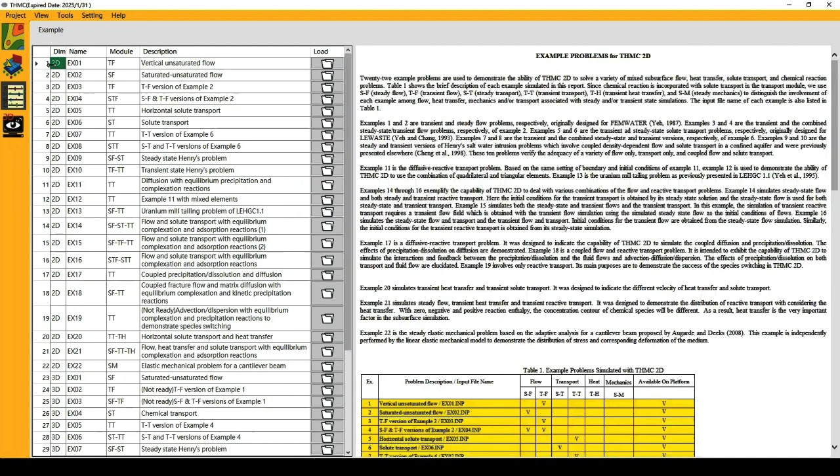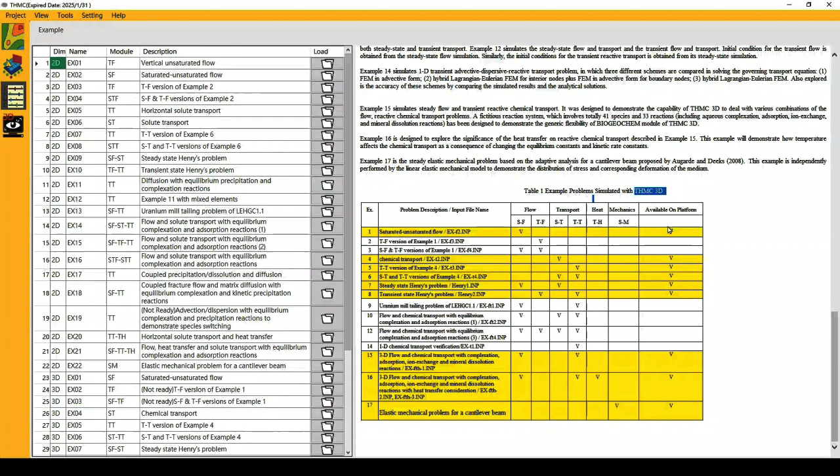The Visualization GUI outputs the numerical simulation results in the form of graphs or contours or the form of an ASCII file. We list all available benchmark 2D/3D examples. For example, you can click each benchmark item to get the detailed information about this problem.

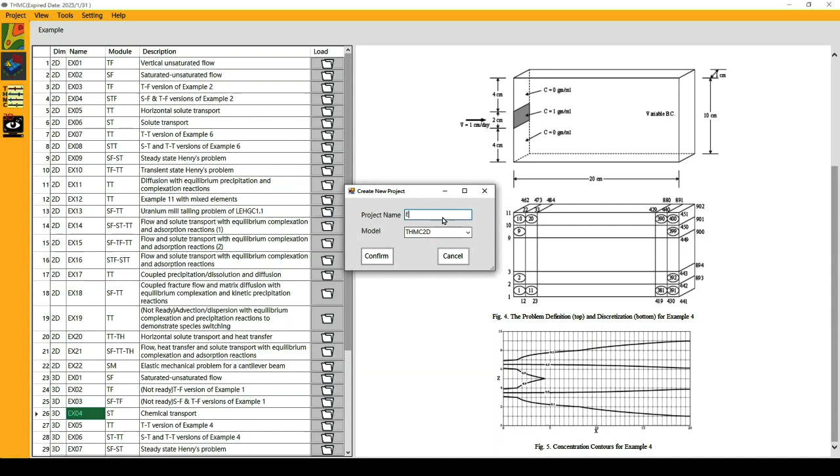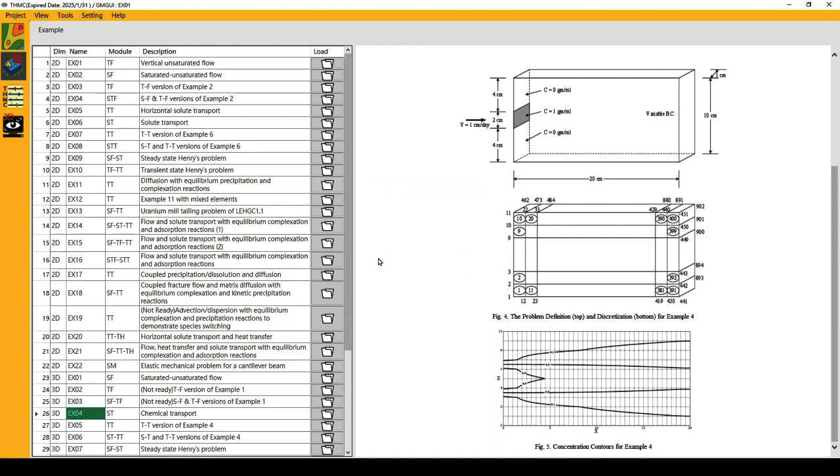To start a new project, select Project and click New. Then, enter the project name. For benchmark problem 1, since it is a 2D numerical simulation, select THMC 2D in Model. Then, click Confirm. Select Geometry GUI. To start a new solution, select File and choose New or Open Solution.

You can define the area of interest by selecting different domains, depending on the problem. For example, in problems involving gravity, you might select the ZX plane. Click on the square tool located on the left side of the window. A panel will then appear.

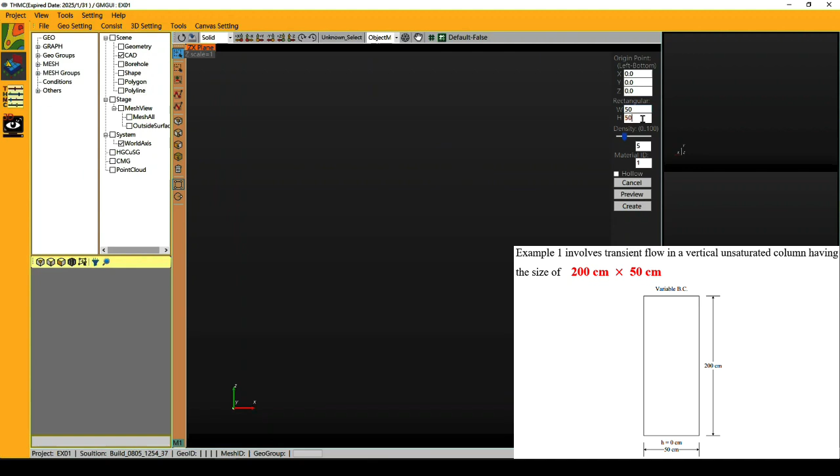After entering W equals 50 and H equals 200, click on the Preview button, followed by the Create button. When you click the Create button, an area of interest measuring 50 by 200 appears on the window. Click on the Mesh Generator tool located at the top of the window.

In Benchmark Problem 1, the area of interest is composed of rectangular elements. Therefore, in the Mesh Generator window, click on Quadrilateral. After clicking on GEO, D1, N4: D1 means 1 domain and N4 means 4 nodes totally. In the panel, selecting Domain 1, you can see that 4 edges and 4 BGs, BG means boundary group,

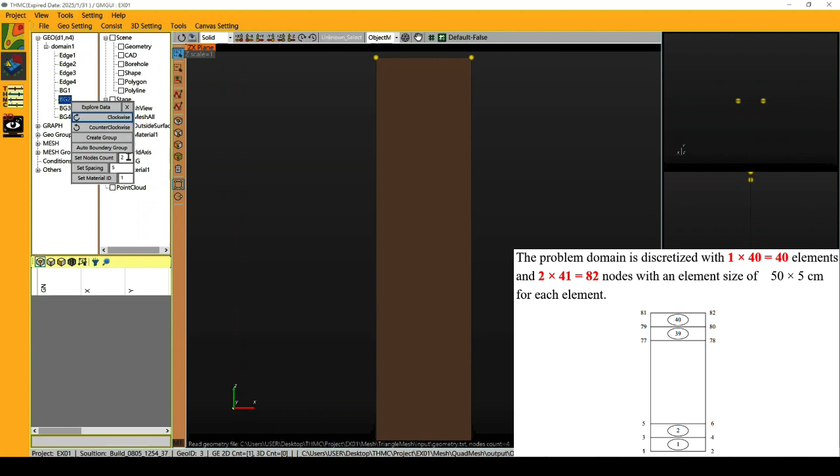have been created. Since the area of interest is divided into 41 nodes in the Z direction, right-click on BG1 and input the Set Nodes Count to 41. Then, click the Set Nodes Count button again. Since the X direction consists of 2 nodes, right-click on BG2 and set the nodes count to 2.

Click on the Mesh Generator tool, and in the Mesh Generator window, click on Quadrilateral. The result of dividing the area of interest into 41 nodes in the Z direction is illustrated.

If the mesh has been created, one would want to set initial and boundary conditions for the area of interest. In Benchmark Problem 1, for the initial condition, since different values were input for the top, bottom, and the rest of the area of interest, we will specify initial conditions for each of these 3 parts separately.

First, with Add Selection selected on the left side of the window, choose Select Nodes. Select the nodes located at the top of the area of interest, and drag to select the 2 top nodes. The window screen appears. In the panel, select Create Group, then the Create Group window appears.

Click on the list box next to 2. Simulation category, and select Hydrological. Then, click on the list box next to 3. Condition name, and choose Initial. Then, click on Assign to Group Name.

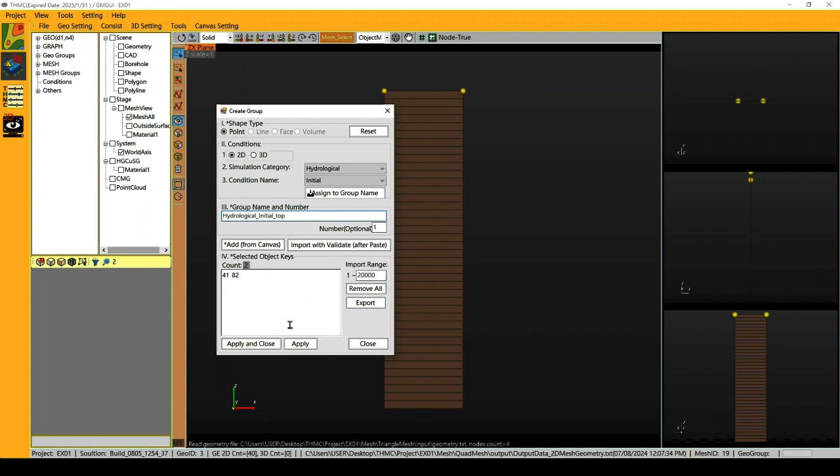If you enter top into the text box under 3. Asterisk group name and number, the result will appear. Then, click on Apply and Close. To set the initial conditions for the nodes located at the bottom. Setting the initial conditions, select all nodes except those at the top and bottom.

Then, we will explain how to set the boundary conditions. In benchmark problem 1, we set a variable boundary condition for the top and a Dirichlet boundary condition for the bottom. First, to set a variable boundary condition for the top, with Add Selection selected on the left side of the window and Labeling Vertex selected on the upper side of the window, choose Select Edges.

To select the element side located at the top of the area of interest, drag to select the top element. Then the window screen appears. To verify the selected boundary element sides, click the tool located at the bottom of the panel. The boundary side corresponding to the top boundary side is node 82, 41.

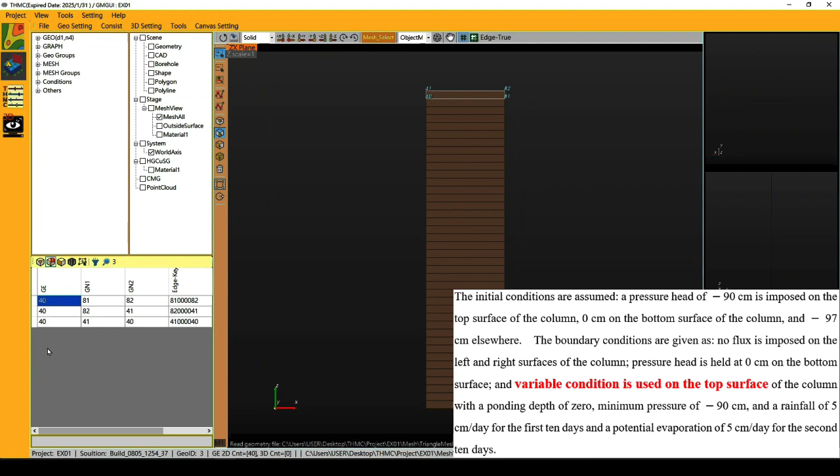Therefore, boundary sides node 81, 82, and node 41, 40 should be removed. Select the boundary sides node 81, 82, and node 41, 40, right-click, and choose Remove Selected Mesh Objects. Then, in the appearing warning window, click OK.

Select the Create Group tool located below the panel. Shape type has line selected. II.2. Simulation category, choose Hydrological. Then, II.3. Condition name, select Variable. Click on Assign to Group Name and type top under 3.

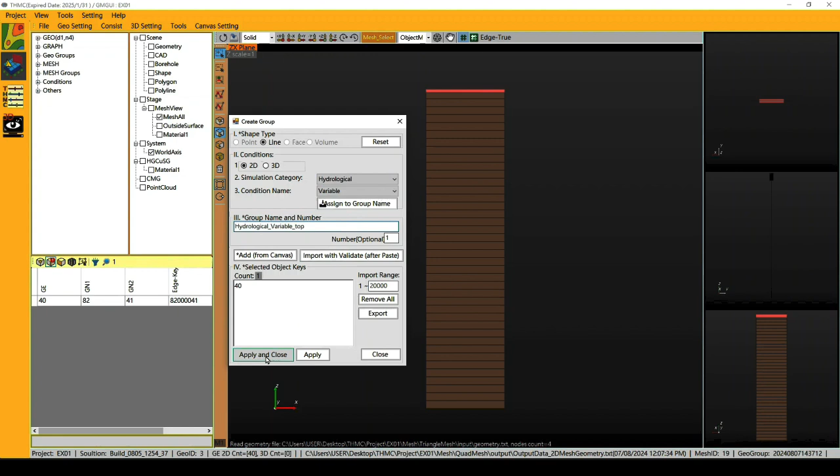Asterisk group name and number. Finally, click on Apply and Close. Thus, the variable boundary condition setting for the top boundary side is completed. The process of setting the Dirichlet boundary condition is very similar to the process of setting the initial condition. The only difference is to select Dirichlet for condition name.

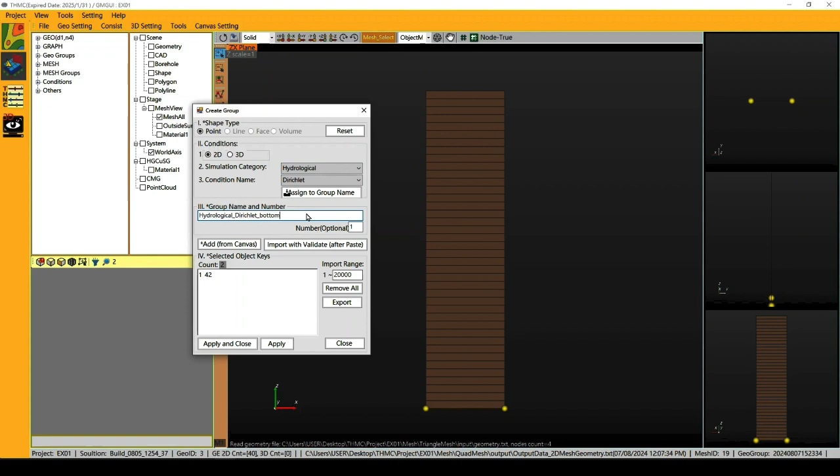We have completed the mesh generation for benchmark problem 1 and finalized the settings for nodes and element sides for the initial and boundary conditions in the Geometry Mesh GUI. After setting the initial and boundary conditions for benchmark problem 1, the subcategories are created under the condition category. You can click on each subcategory to verify if the selection has been made correctly. Lastly, to save the mesh information, initial and boundary conditions set, click Save Solution, then, in the Save Geometry pop-up window, click OK.

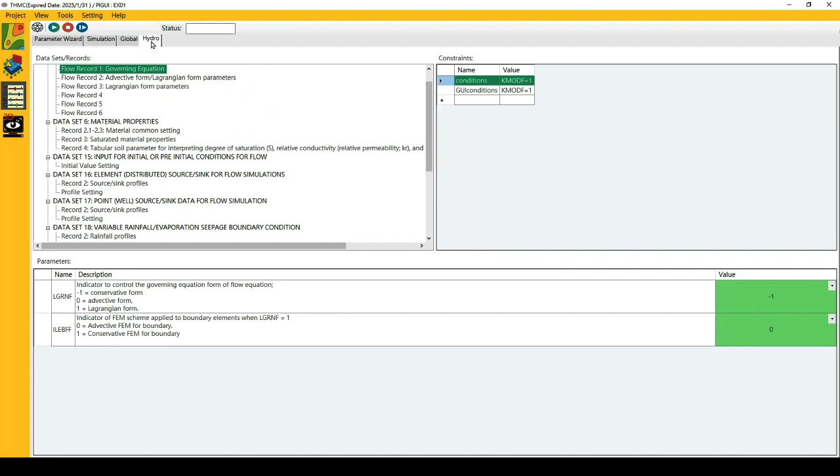The Model Parameter Input and Simulation GUI consists of 4 major functions: Import Mesh and Boundary Data, Start Model Simulation, Stop Model Simulation, and Restart, as well as 4 tabs: Parameter Wizard, Simulation, Global, and Hydro. To import the mesh information and the initial and boundary condition settings entered in the Geometry Mesh GUI, click on the Import Mesh and Boundary Data tool. Then, the Mesh Import window pops up. Choose CM in the unit and click on Import.

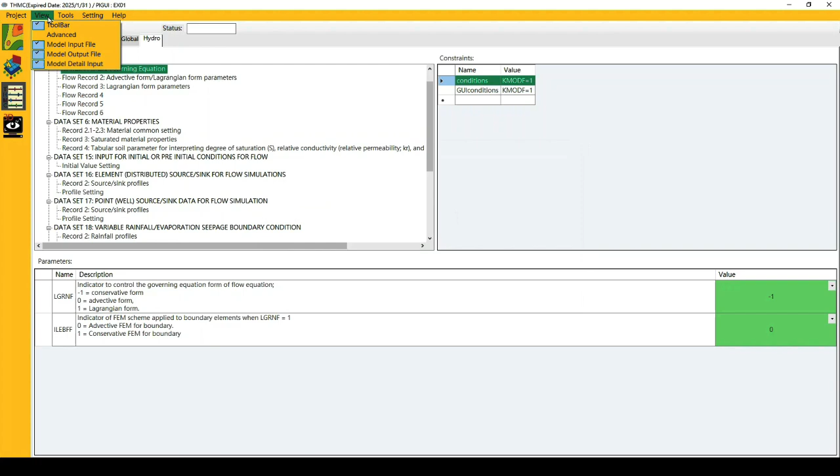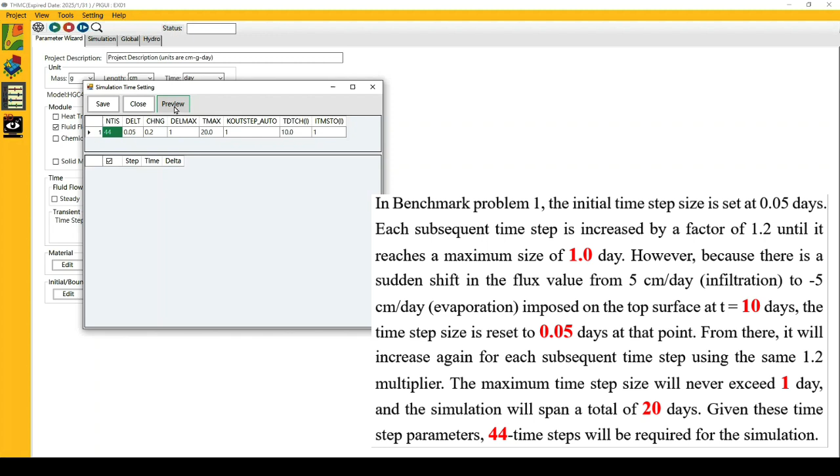To proceed with the numerical simulation, select the Advanced option in the View menu. Enter the project description and unit in the Parameter Wizard tab. For benchmark problem 1, the units of cm, g, and day are used, so select the corresponding units. Then, in the module, select Fluid Flow and choose the Transient Fluid Flow option. Click on the Time Preview button. This action will prompt a pop-up window of Simulation Time Setting. Change parameters for benchmark problem 1. To check if the time step size has been entered correctly, click the Preview button. Then, click on the Save button.

To input the material properties, click the Edit button under Material. This will bring up the Material window. The domain is assumed to contain soil with a saturated hydraulic conductivity of kxx equals kxz equals 0 cm per day and kzz equals 10 cm per day, a porosity of 0.45, and a residual water content of 0.15. Consequently, when the material pop-up window appears, check hydraulic conductivity next to flow property. Additionally, enter the following values.

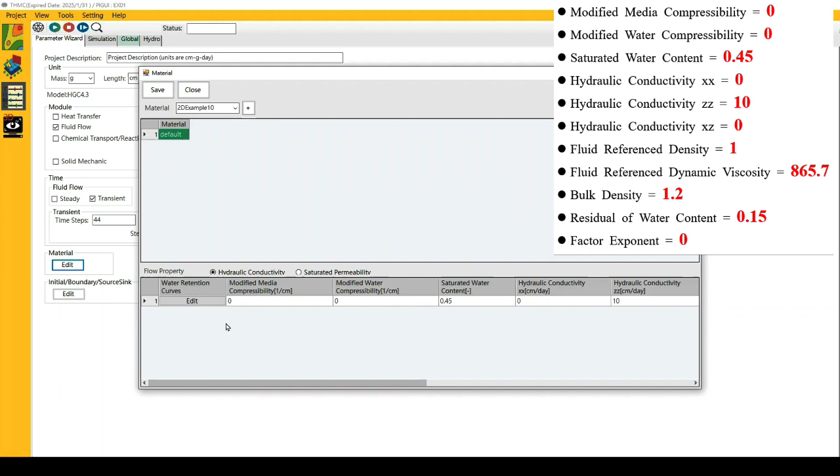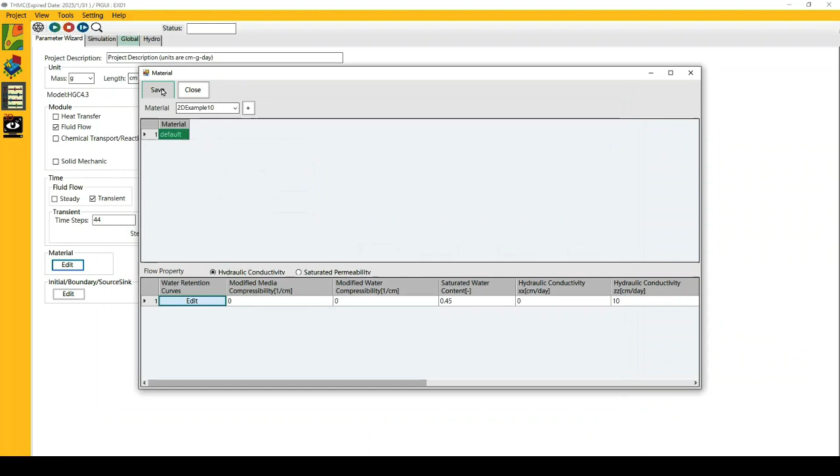Click the Edit button located beneath Water Retention Curves, then the Water Retention Curves window will pop up. In benchmark problem 1, the unsaturated characteristic hydraulic properties of the soil are given as follows. Click Confirm to close the Water Retention Curves window and click the Save and Close buttons to exit the Material window.

When you click the Edit button, the Initial Boundary/Source Sink window will pop up. The initial conditions are set as follows. A pressure head of -90 cm is imposed on the top surface of the column, 0 cm on the bottom surface of the column, and -97 cm elsewhere. Input the initial conditions. Select Hydrological/Initial Condition in the list box for the spatial type and then click the button. After that, in Conditions, select Hydrological Initial Top, Hydrological Initial Bottom, and Hydrological Initial Rest in sequence. Then, enter the corresponding initial values into Initial Pressure.

Choose Hydrological/Dirichlet Boundary in the list box from the spatial type, then click the button. In Conditions, select Hydrological Dirichlet Bottom and click the Edit button. Clicking the Edit button, the Profile Input Form window will pop up. Click the button next to Profile and type 0 and 0 for total heads and data points.

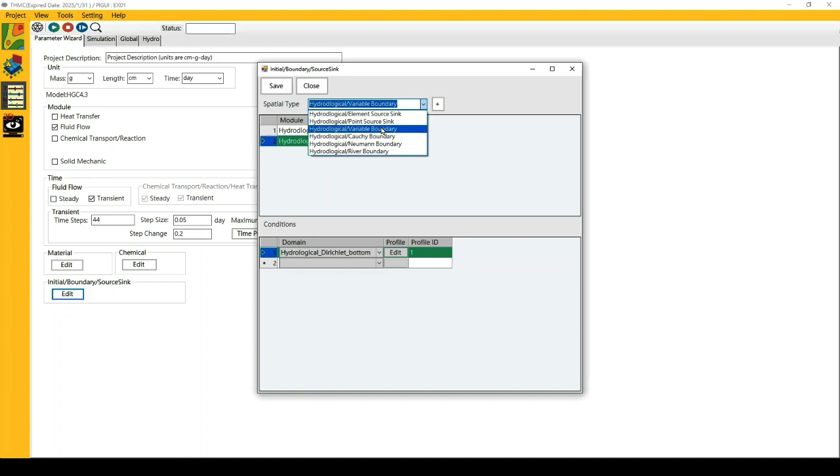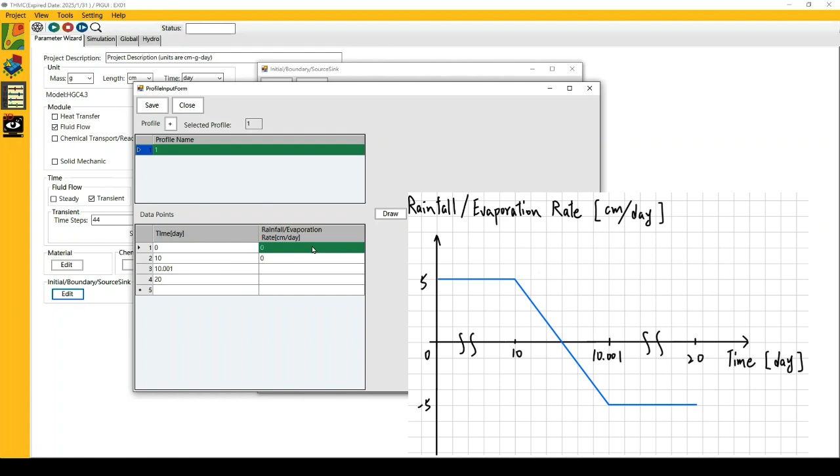Select Hydrological/Variable Boundary from the Spatial Type drop-down menu. Then, click the button, and in the Conditions section, choose Hydrological_Variable_Top. Enter 0 for ponding depth and -94 for minimum pressure head. After that, click the Edit button to input the profile. Enter the values for time and rainfall/evaporation rate. Then, click the Save button to close the Profile Input Form window, and click the Save and Close buttons to exit the Initial Boundary/Source Sink window.

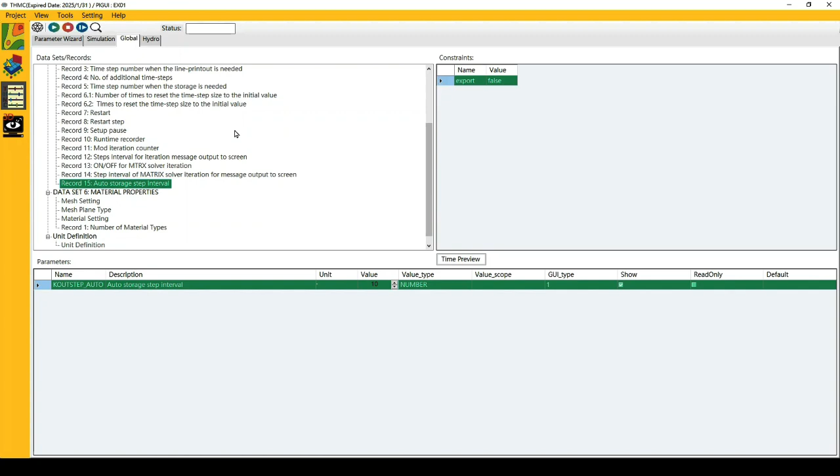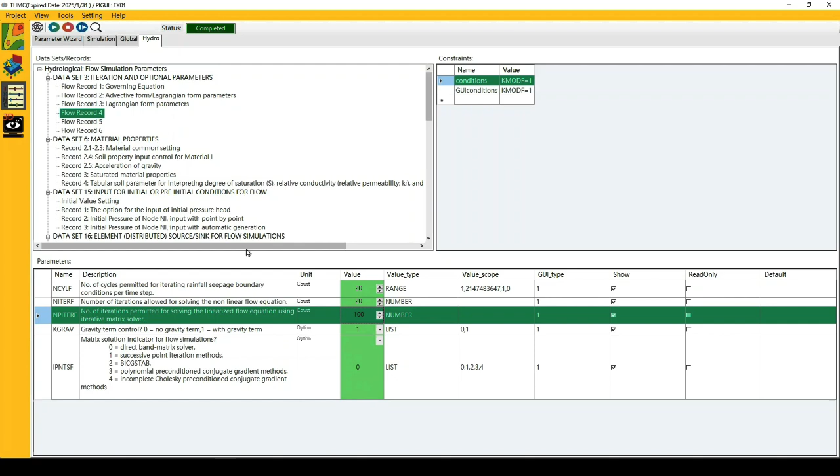In the Hydro tab, you can view and modify inputs related to iteration and optional parameters, material properties, initial conditions, sink/source, and boundary conditions. Since benchmark problem 1 simulates the vertical flow of fluid, from data set 3 to flow record 4, set KGRAV equals 1. For matrix solution, choose the direct band matrix solver, IPNTSF equals 0. Furthermore, since the tolerance is set to 0.02, from data set 3 to flow record 6, set TOLF equals 0.02, TOLBF equals 0.02. The input for the model parameter input and simulation GUI has been completed.

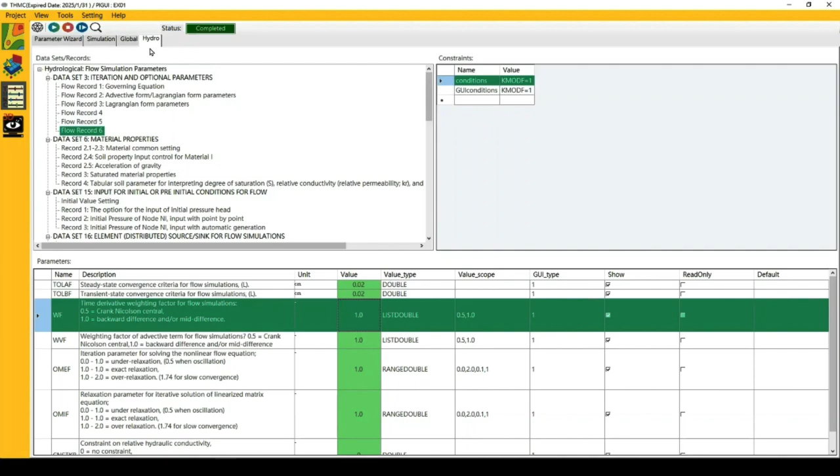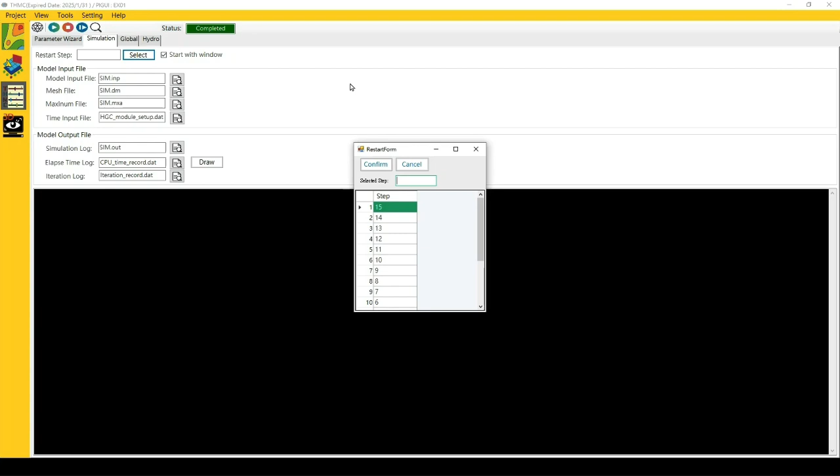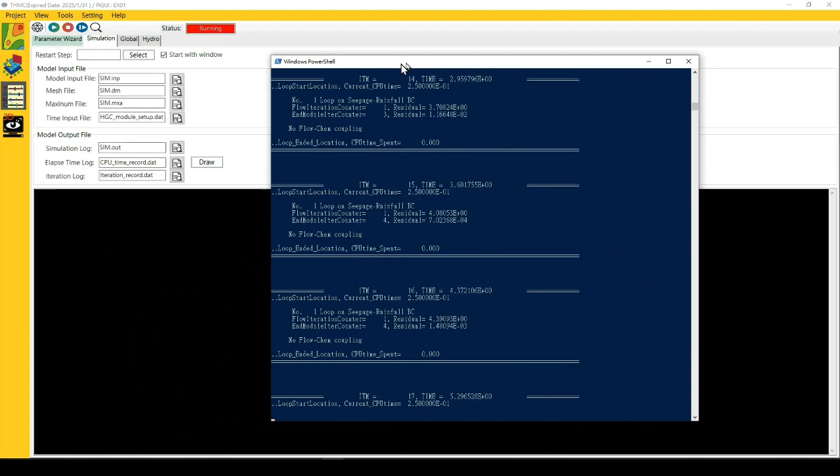Now we see Start Model Simulation located on the upper left side of the program. You can also click Stop Model Simulation to interrupt the simulation or Restart to resume the simulation from the last step. Or you can click the Select button beside the Restart step to choose the step to continue the simulation. The simulation will start with the PowerShell window with better performance. Or you can uncheck Start with window to show the Log window on the downside. Once the numerical simulation starts, you can check the current simulation process status in the PowerShell window or log window.

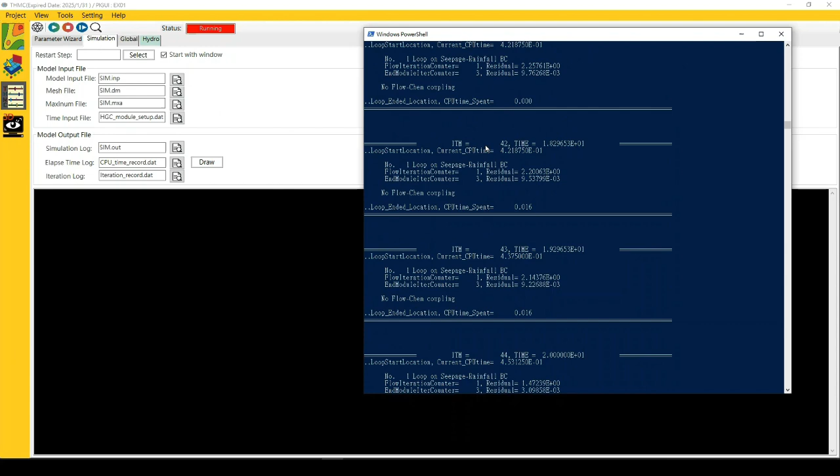If something is wrong and you need to debug, you can check files in the model input block and model output block. The model input block includes the model input file, mesh file, maximum file, and time input file. The model output block includes simulation log, elapsed time log, and iteration log. And you can check the last message of the log window and the last message of the simulation log as the first step when debugging. You can also turn on the advanced mode by clicking Advanced in the View menu bar.

Thus the simulation will stop in PowerShell without closing. Then you can see the error message or manually start the model execution in PowerShell. There's a Draw button beside the elapsed time log. You can click it to show an XY plot for the accumulated elapsed time chart.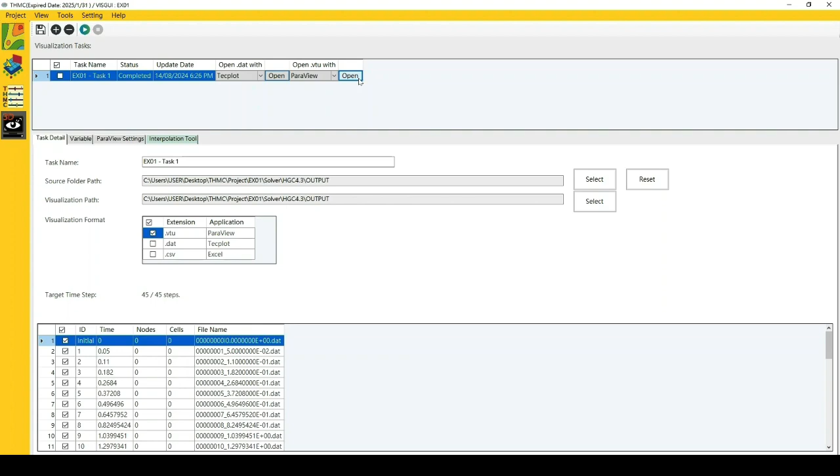Once the conversion is finished, click the Open button next to the ParaView button on the selected task. A ParaView window will open, displaying a mesh with color-filled elements. Click the Open button next to ParaView.

This section introduces basic concepts and utilities of ParaView for analyzing your visualized simulation results. The main visualization panel is located at the center of the window, displaying the colored mesh. Various toolbars are positioned at the top of the ParaView window.

Find the Time drop-down menu in one of the toolbars at the top of the window. Use this menu to select specific time steps from your simulation. The main display panel will update to show the visualization for the selected time step.

Locate the Playback Control toolbar next to the Time drop-down menu. Click the Play button on this toolbar to automatically advance through time steps. This feature allows you to view the visualization results as an animation. For example, you can play the animation in this case for pressure value changes.

Special notes: experiment with different variables and time steps to gain a comprehensive understanding of your simulation results. The playback feature is particularly useful for observing changes over time in your data.

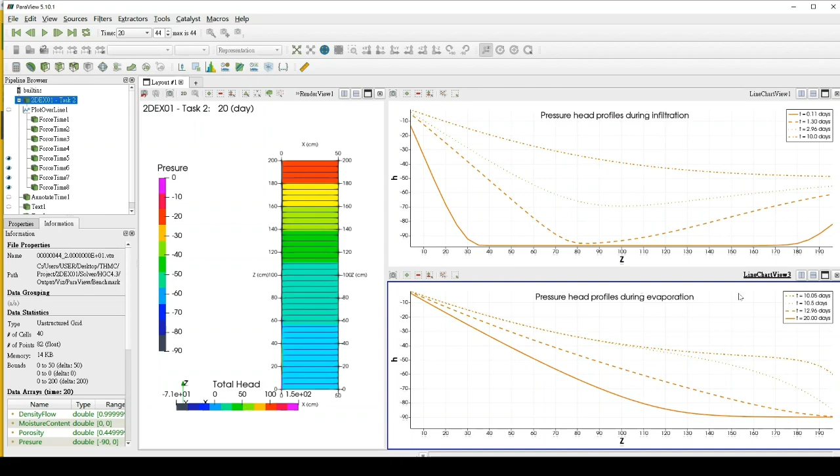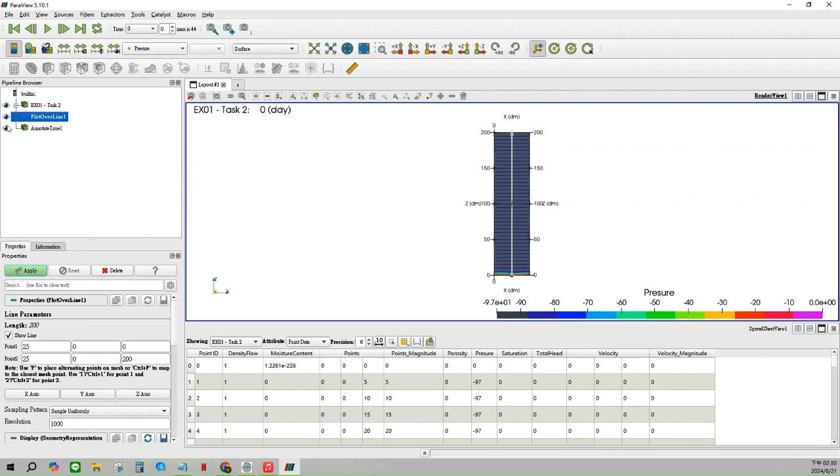Click Plot over Line, then the graph will show the line. Click Z-axis, and the line segments in the graph will become vertical to the XY plane. Click the visible icon, indicated by an eyeball, on the left side of the tree view nodes, then click Apply. A line chart will appear on the right side window of the screen.

Proceed to click on Filters, followed by Temporal, and then Force Time located in the top menu bar. Next, input the appropriate time step values. The window in the lower left corner can configure the properties of the chart, providing the option to redefine the labels for the left axis title and bottom axis title.

Click Apply, then click the visible icon, indicated by an eyeball, next to Force Time 1. For the first checkbox below, a single click will select all items, while a double click will deselect all items. Select Pressure to display the pressure line.

Disable the visible icon, indicated by an eyeball, adjacent to Plot over Line 1 so that only the pressure line is visible on the right side of the screen. Rename the pressure line to T equals 0.11 days. By scrolling down, you can modify the line thickness, line style, marker size, and chart axis properties.